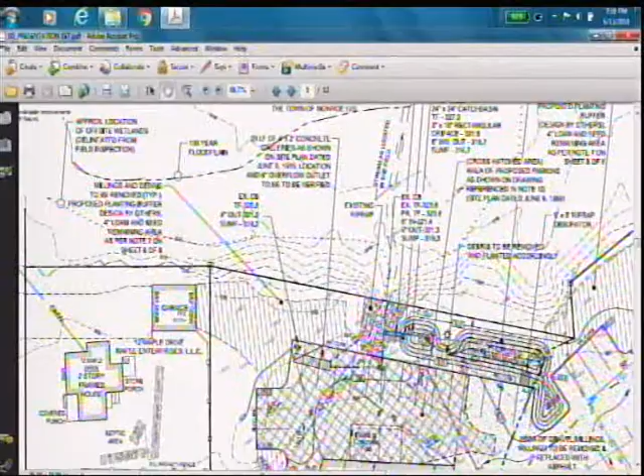We will be providing soil erosion and sediment control measures, which will be installed prior to any construction activities on the site. We're proposing silt fence down gradient of all proposed construction activities, as well as a stockpile area during the construction process. We'd also be providing hay bales in front of the proposed rain garden so that no sedimentation will flow into the rain garden during construction.

A comment occurred that Scott addressed, that we did not have the required 25 feet from the property line with the parking lot, as well as the 42 feet needed between the aisle and the length of parking in this area. From this corner of the building to here, we only have 41 feet, so we will have to eliminate 2 parking spaces, which will also reduce the amount of impervious area in the parking area, reducing the amount we'll be providing for retention in the stormwater drainage system.

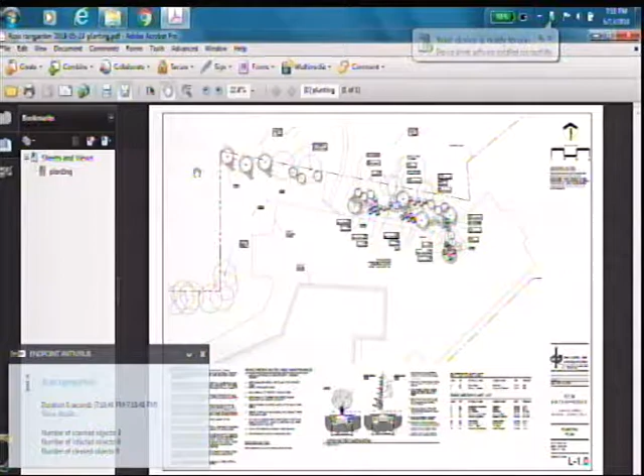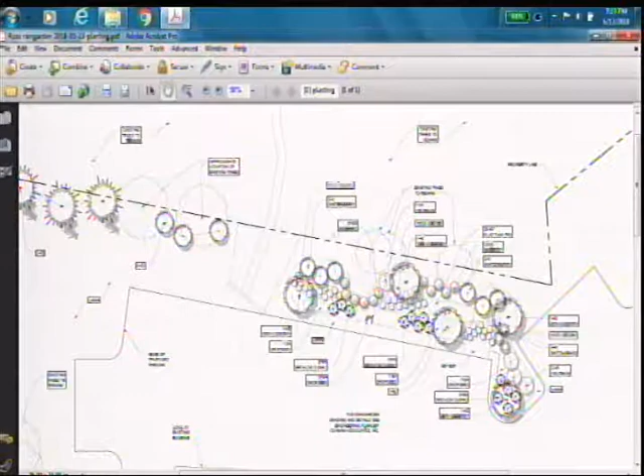Good evening. My name is Dean Pushler, licensed landscape architect, a sole proprietor working for REM. I was asked to come in and plant the rain garden as well as the buffer area. The rain garden is in this area, with a finger that comes up into this little island.

What we're proposing is 5 trees - Amelanchier canadensis, which is serviceberry - large trees, small shrubs, large trees in that aspect. The existing area to the north is heavily wooded with red maples, ash trees, and some existing white pines staggered on the property line here and here. I'm proposing 3 white pines as a buffer area, and 3 arrowwood viburnum here, interdispersed within the existing white pines.

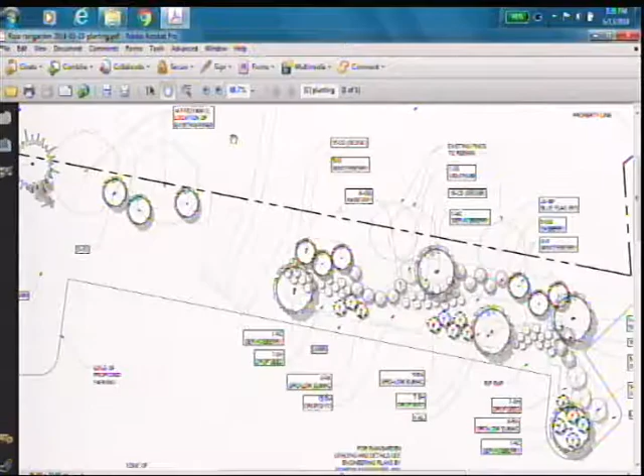Also within the rain garden - let me zoom in - along the bottom where it's flat, where most of the moisture will be, I have sedge, iris, and blue flag iris. There's switchgrass along the edge, winterberry along the edges, inkberry along the front, Gro-Low sumac here and here, and then prairie dropseed grass here and here, with some additional viburnums in this little island.

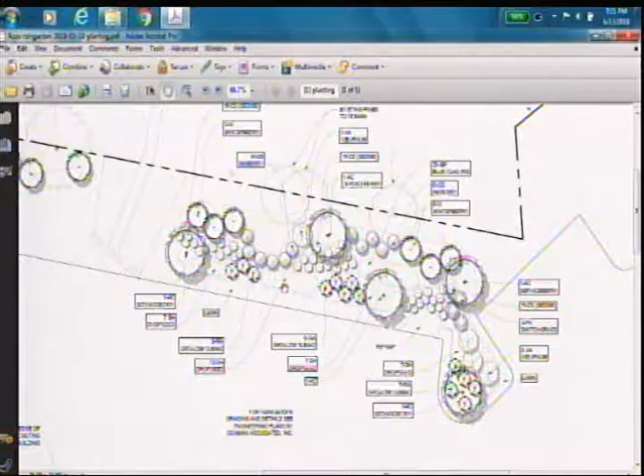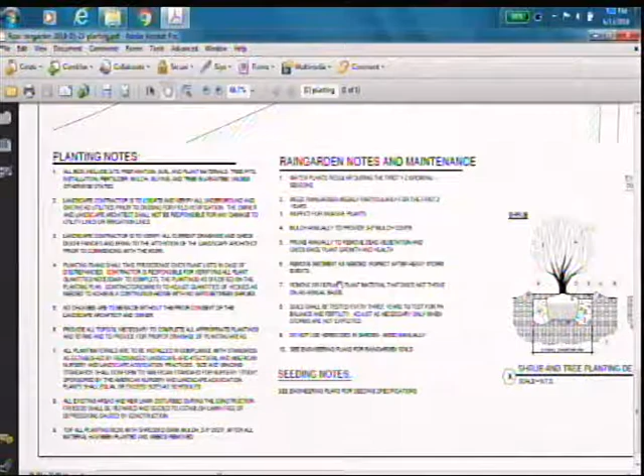So that, along with the drainage that was proposed, really will take care of stormwater. Maintenance-wise, it's pretty straightforward - I do have a maintenance guideline. Watering plants during the first two growing seasons, weeding, inspecting for invasive plant material, mulching annually to keep the weeds down, pruning, and removing sediment as needed once it's established and the parking lot's paved. That's basically it for the rain garden.

Dean, can I get your spelling of your last name? Yeah, P-U-S-H. Thank you.

So that's our proposal. I'm sure staff will go through their comments, but just to highlight a couple - there was that question Mark spoke to of the width in the parking area. We would accept as a condition of approval to remove 2 of the spaces to make sure we did conform to that. There was also a comment about additional buffer planting over here.

I believe, Scott, that's the area you're referring to. Historically, and we have a picture, an aerial survey from 1990 which I will submit and show around - unfortunately I don't have copies - but this had really always been open area, just high grasses. There was a cluster of trees around here, white pines that my client planted at the town's direction, but those have died over time and are no longer there. This area over here has really just been high grasses for as long as they've owned it.

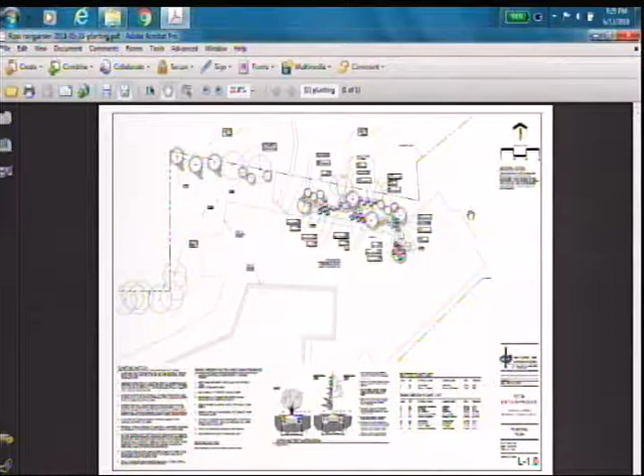Other reviewing and thinking, a couple things. Go back to your drawing of the site layout. I had questioned, sorry, I've got to switch.

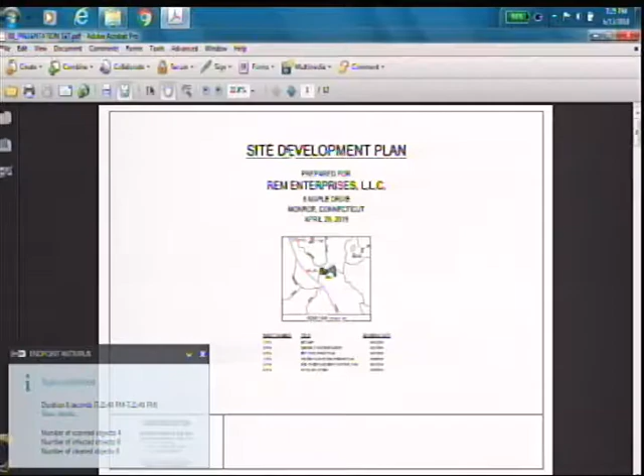The dimension for the parking lot -- you're saying you could reduce by 2 spaces, but I don't think you have to, because one of the things I was talking about was the actual dimension, the 42 feet. I believe you can extend the parking lot, the pavement portion of it, into the setback.

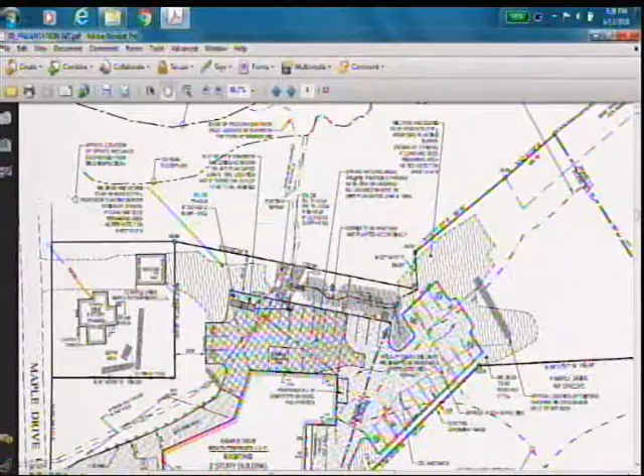That's not a restriction on the setback, now, they may have a buffer. You're talking about a zoning buffer? I think there's a zoning buffer in the I1 of 25 feet. In the B1 zone you don't have that, but in the I1, you're restricted. So you're being forced because of the zoning, not just the setback line. Exactly -- I was going to point out that you didn't have to with just the setback.

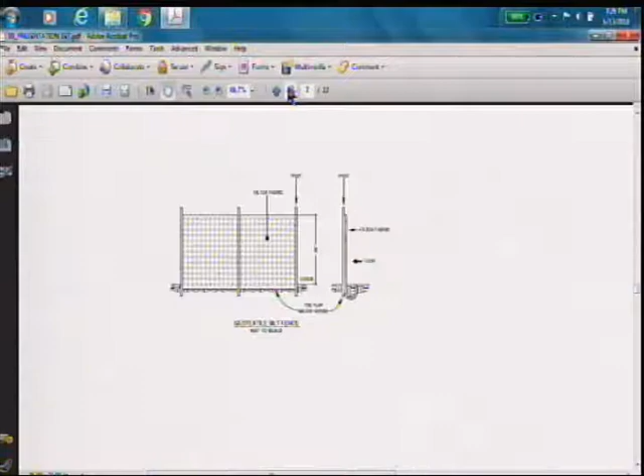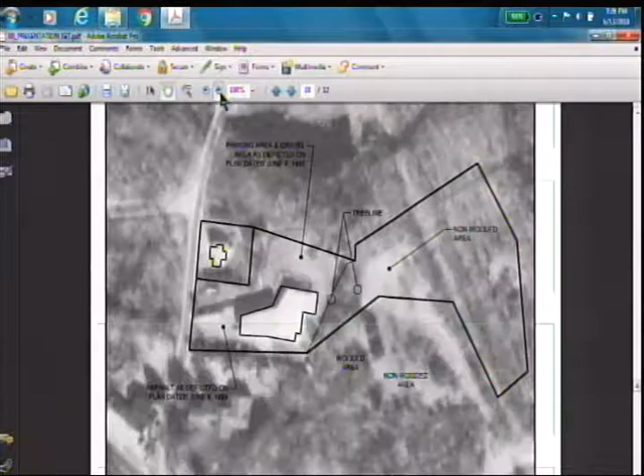Okay, thanks. Mark, that picture is in here just to show that -- it's a 1990 aerial photo. So if you look here, you can see this area, the marked non-wooded area, and then here this tree line area.

These were white pines that have died since. When were they planted? Early 80s. To that point, we normally do not recommend using white pines as plantings any longer because they don't last.

So if you could come up with something that would -- I realize you're trying to incorporate it into the existing ones, but if we could come up with something better than white pines that doesn't die off in a couple of years and blow over, that would be great. We're proposing 3. So we could substitute. Dean, why don't you come on, we could come up with a substitution. I was trying to use a native plant.

Understood. Well, we do have other deer-resistant and usable options. Native is tough, and obviously the white pines, the deer browse too. Cedar, Alaskan cedar, or eastern red cedar is a possibility. Should we -- spruce? Spruces, white spruce, something a little tougher. White spruce is a little tougher, yeah, looks a little nicer.

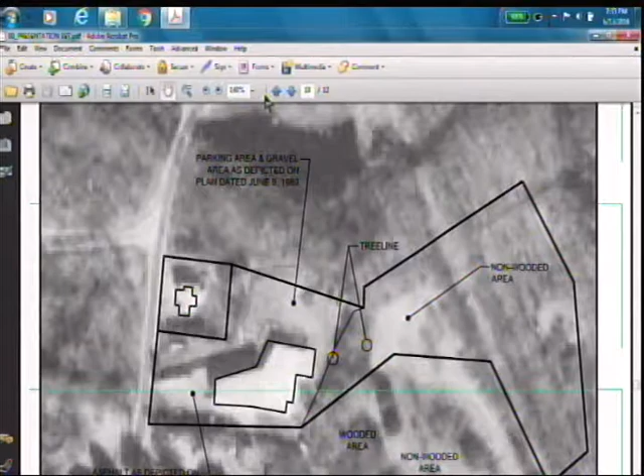Is there no curb in that area? Would the curb be part of the parking lot? It's sheet flow right into the rain garden, but the rest of the parking lot has curbing. I have a curb along the main portion, then an opening of about 5 feet with riprap for energy dissipation and erosion control going into the rain garden.

Now, which two parking spaces are you getting rid of? The one closest by distance to this corner of the building, right here, and this one right here. So what do you do with that area?

We can basically cross-hatch it out and put a no parking sign there, since I have a minimal slope over there, like 1.5%. If I create a curb running around, it would just be a paved area marked no parking because of a zoning issue. I don't know if zoning's going to like that so much—they're going to look for that being a green area.

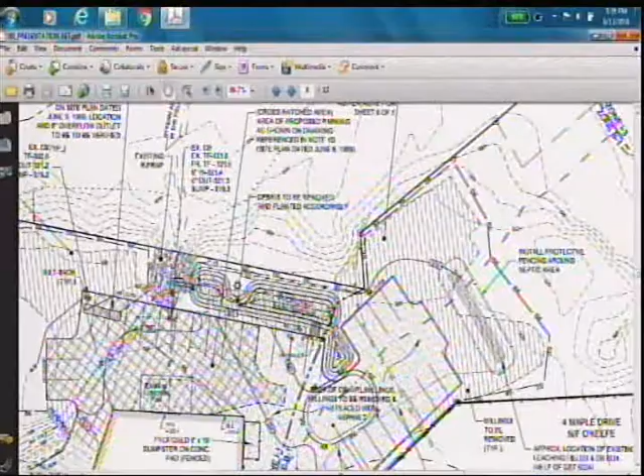Why don't you put the point of runoff at the end of the parking space? At that point, in the area over here—what contour is that? 324. And this one? 323. Usually you can crease the pavement and bring it over, but you've got a catch basin there, so you can't do that. Right now, basically where I have that valley... that's a high point there, isn't it? No, there are high points over here, your valley, so everything's going that way.

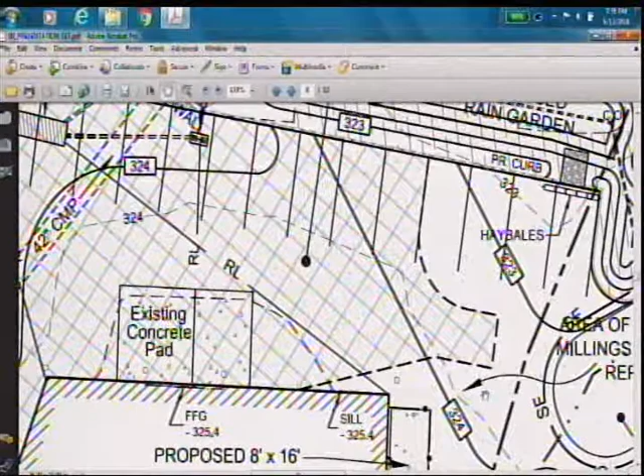Swale, sorry. So you've got a high point over here, and this is going this way, and it's going this way, so you can take this contour and pull it over here more, warp it a little bit, and make that island the high point. Then you might as well make it a green area—it's cheaper and it's less impervious pavement. My take on that is it should be green. Yeah, that can be done. Maybe I don't extend it the full 18 feet out with the green area. Typically you'd just have an island where those spaces were.

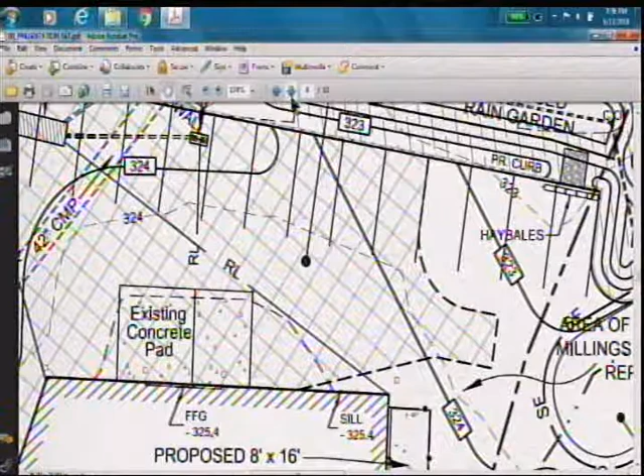I had a question on the sediment and erosion control plan—if you can go ahead, if that's the sheet or not, I'm not sure. It's a detail sheet, back up. Specifically, I wanted to blow up the discharge point from the rain garden into the water course.

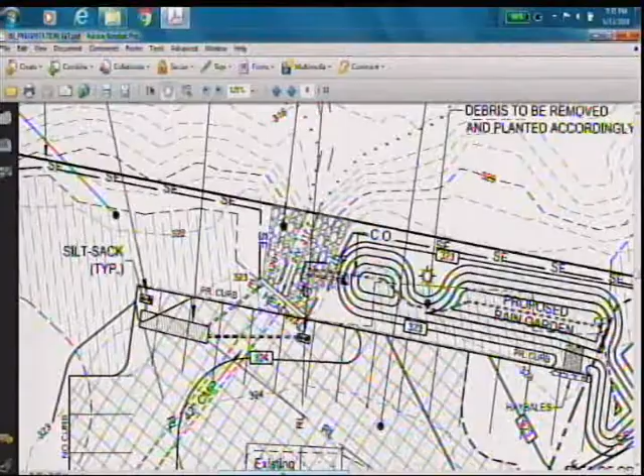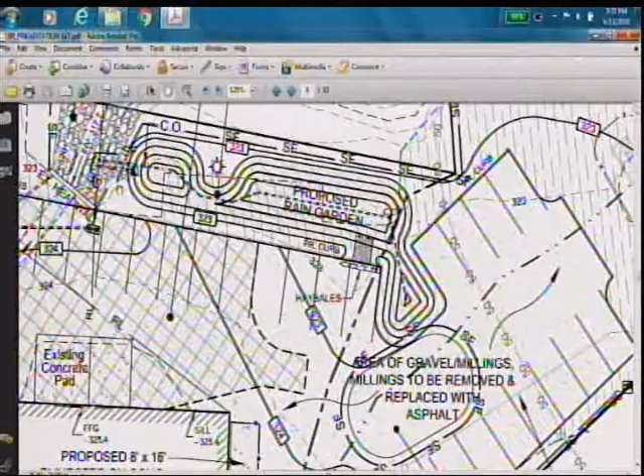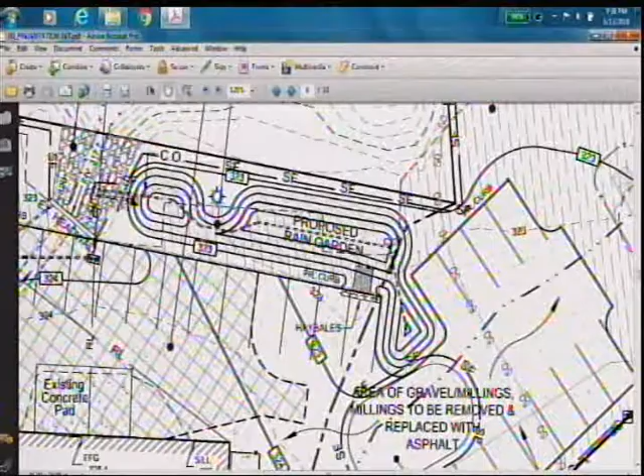So the silt fence is proposed 2 feet from the edge of the water course at the time, whatever flow that it was captured. Is there any way that you can just cut the pipe off almost right outside the edge of the catch basin and cut it right there? You'd have a riprap slope going down to the water course already, instead of being right into the water with the pipe.

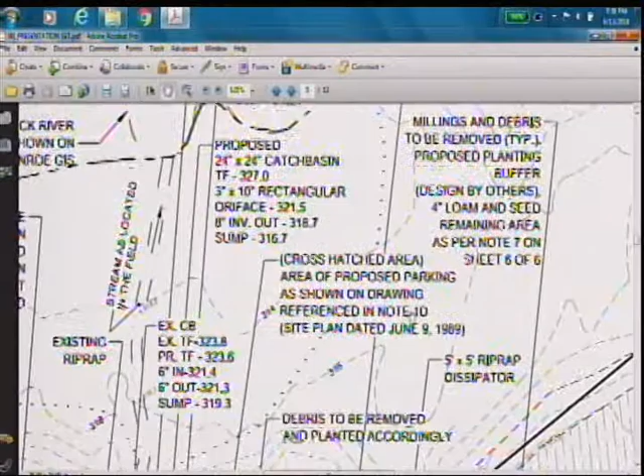The elevation of my outlet control structure, I might have to go to the other page. Hold on. My outlet control structure, my orifice invert is at 318.7. Top of my orifice going into the catch basin is at 321.5. I could potentially raise that up as high as the 8-inch outlet coming out, going into the stream, as high as I possibly can, so I don't extend the 8-inch pipe that close to the stream, cut back as much as I can.

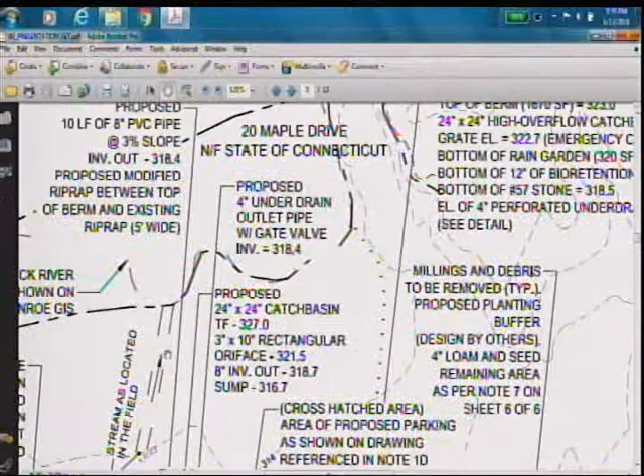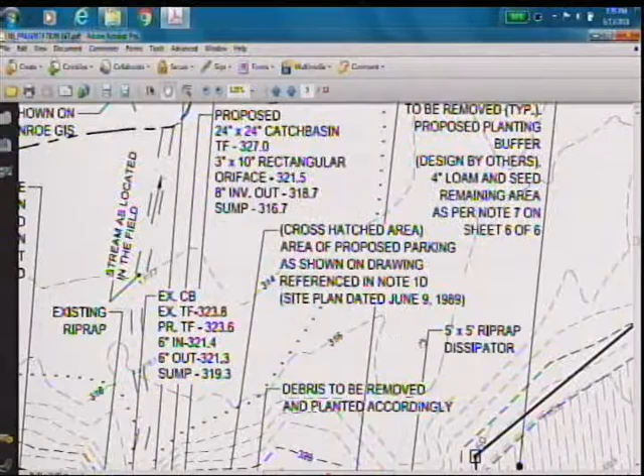The under drain pipe too is just as close, and the under drain is at 318. Yeah, the under drain was assuring that what he's got is water quality below the outlet orifice, assuring the basin would dry out after rainstorms. So I asked for it to be lower like that and run a separate pipe out to the stream. So if he raises that, it's gonna be a problem with assuring water quality volume, if I'm remembering correctly.

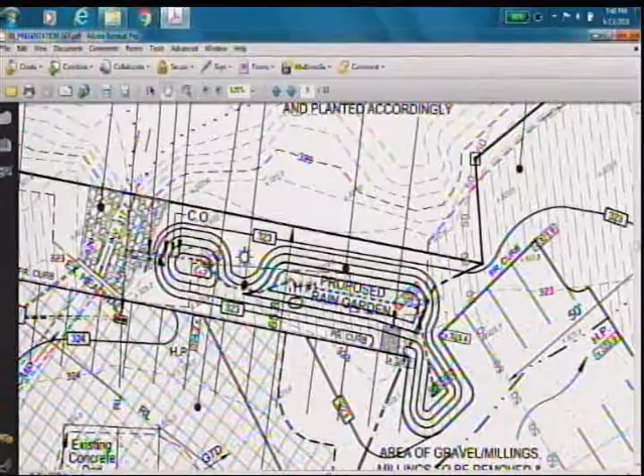So why not do a little tweaking with your proposed parking and shift, if you can, the rain garden further away from the edge of the head wall there? Right now you're kind of limited in space to put the rain garden. Well, that's what I mean, you may have to lose a couple parking spaces. But he would still need to get that elevation for the outlet, and then I can't discharge it onto the neighboring property.

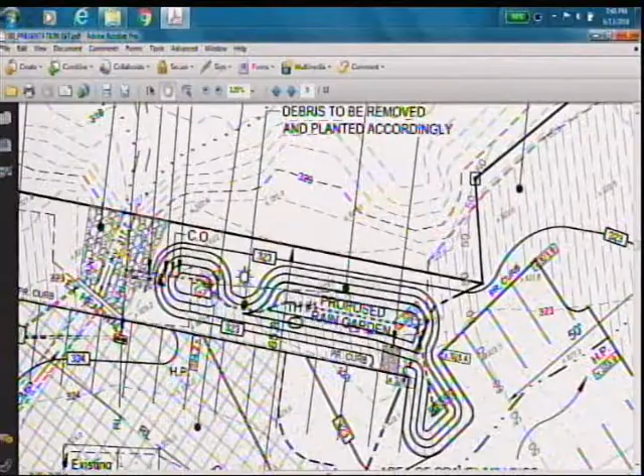We're talking about an area that's already disturbed, has riprap stone in it. And these pipes are going to have minimal velocity coming out of them, it's just an under drain. The trouble is the depth he needs to drain the basin. So whether the pipe's there, in my opinion, you're better off with the pipe being close, because if he pulls the pipe away, then he's got to ditch it, and that's where you're gonna get erosion because it's steeper.

So he doesn't have too many options because of the elevation he needs to drain it, not because of how the site is being graded. If he didn't want to go that close to the channel, he would go off to the north, but they don't own that property over there.

They could put it out anywhere along here and they wouldn't be anywhere near the channel, but they'd have to go way out there, and it's closer to the big river, plus they don't own the property. And the rain garden's shallow itself anyway, it's only 3 feet in depth.

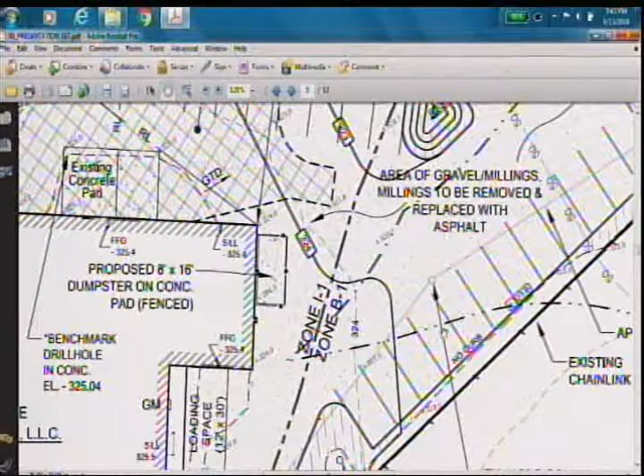And is the chain link fence staying? It says there's an existing one, is that supposed to stay where it is? I believe the chain link fence separating you and O'Keefe, was that put up by you? O'Keefe put it up, that's the neighbor's chain link fence. Oh okay, then that's a non-issue.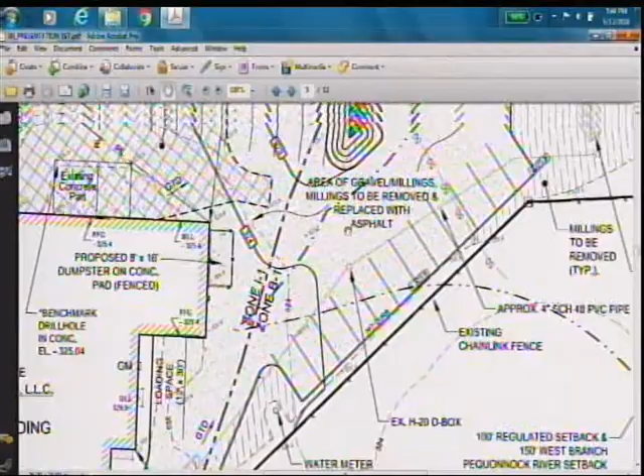I'm a little confused, pardon me if I missed it, but the area to the east where you're proposing the final 10 parking spaces, where the millings are being removed - above it says millings and debris to be removed, proposed planting buffer designed by others. Is there a planting plan designed by anybody for that section?

Is it in the last page? And note 7, I think that's what it refers back to. It does say note 7. I did not read that. It'll just be seeded, that's landscaping, just grasses.

So should there be some kind of line of demarcation there, or are we gonna have the same issues? Is there any future plans for that area? No, no, I mean it's possible in the future, but we would have to come back here obviously. So if there were any future plans for it, you would see it again.

So that's seeded with just grass seed that has to be mown regularly? It's in the engineer's plan, that's note 7, it's perennial ryegrass basically, wild grasses. So how often would it be mowed? Typically they mow that twice a year, spring and fall.

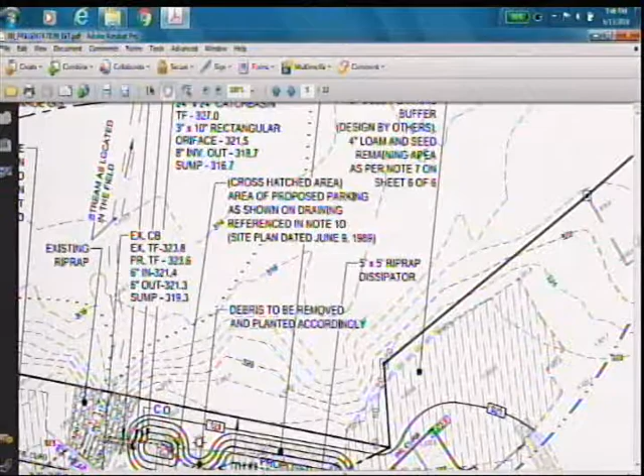Sorry for missing that. Is there a maintenance plan for the rain garden? Yes there is. I went through the maintenance schedule. I'm sorry, I did not. That's okay, I must be on another plan, I apologize. It was just a quick maintenance thing - weeding, fertilizing, mulching, no fertilizing typically, removing sedimentation, that sort of thing. And no herbicides, right? Correct. I'm sorry, thank you very much for your patience.

Wetland markers, so where are they? Yeah, no, no herbicides, just wanted to make sure. Okay perfect, thank you.

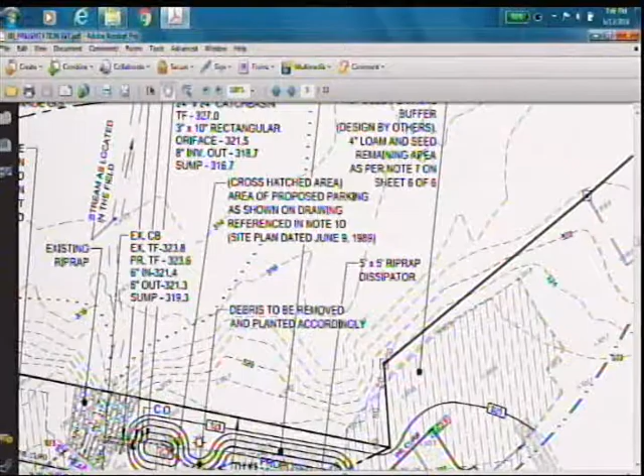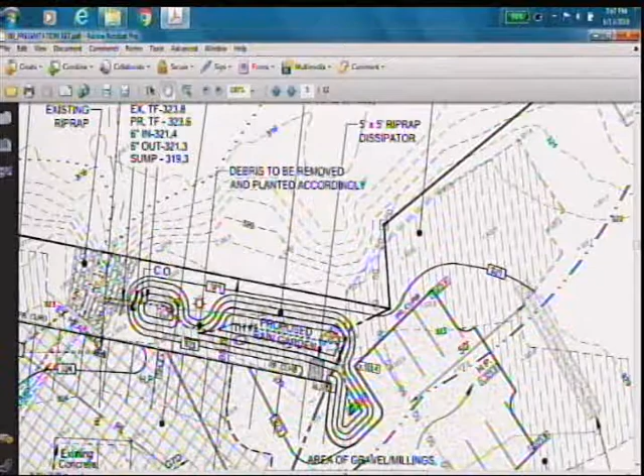On the two spots that have to be eliminated, could it possibly be done where they just pave the back edge 3 feet wide, so they don't have to regrade anything, let the water pass through and just shorten that island by a couple feet? No, we discourage that - it's a maintenance issue, in the winter the water doesn't go through there, so we try to avoid that. The expensive way of avoiding it is to put an additional basin in.

But the way that it's graded, they'll be able to put that island and the water will go either way, away from the island in both directions, so it's not really needed. In extreme cases I've seen it happen a couple times where they've done that, but it's not a great thing to do. Yeah, I get this.

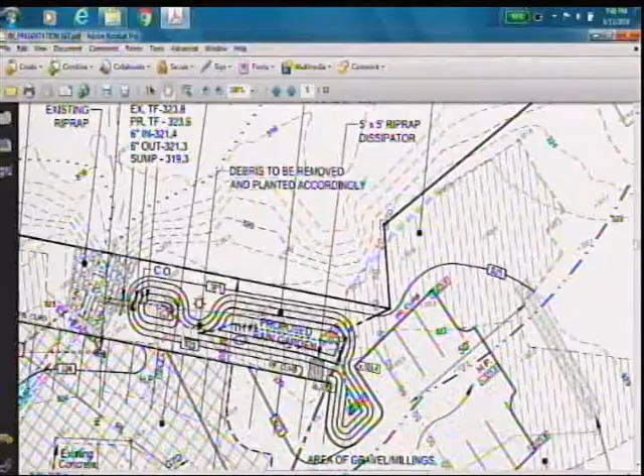Do I hear anything else from the commission? Are there wetland markers on here anywhere, and shouldn't there be? Are there any wetland markers plotted on the plan? I think we're just - no, basically it's just a channelized stream on our property, and then everything was kind of, on the neighboring property, it was just kind of site located by me, as far as the wetlands.

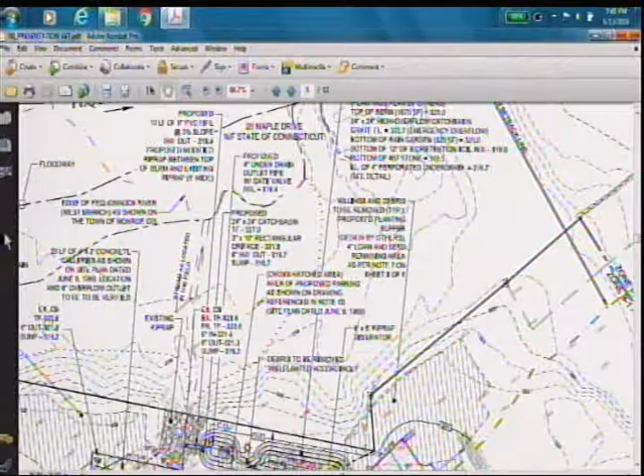I have to say that I missed that one, so we didn't talk about that. Oh okay, typically what happens, especially with remediation, is the commission's used to seeing markers. We have markers that indicate that - they're small, 4-inch metal, like $1.50 each. And they go - is there a fence there or no fence there? No, there's no fence there.

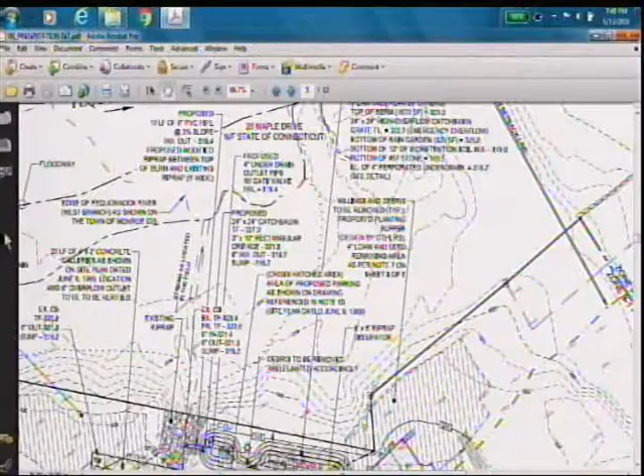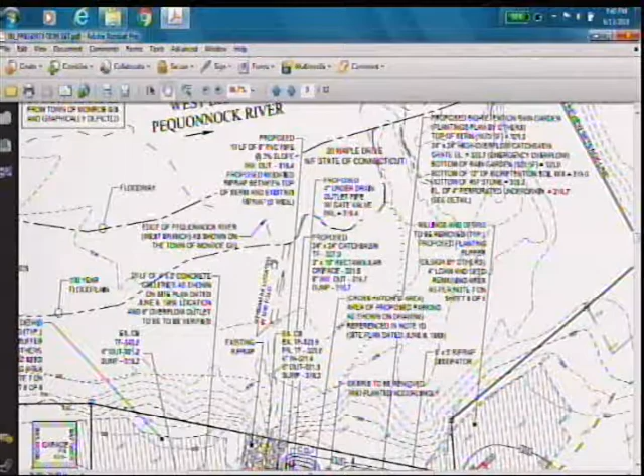They would go on trees or 4x4 posts, and they're typically put in - what do you guys want them, every 50 feet, 75? 50 is good. Where would we put them? My suggestion would be to put them on the property line.

Because they're gonna be maintaining the rain garden, even if those wetlands are on the neighboring property lines. Yeah, even because it just demarcates the regulated area for future things. Okay, that's all I have.

Anything else from the commission? Anything else from the applicant? No, thank you for your time.

Before you close, one last thing, just for the record, the bond recommendation in my report was $18,000. Were all of your comments addressed, Scott? Everything that I need addressed, I believe they did.

One comment about the spillway, just shifted over to the virgin area, I'm assuming you didn't have an issue with that, you didn't say? No, not at all. I think I'm okay, I can work that out. Okay, that's all. Thank you, everybody.

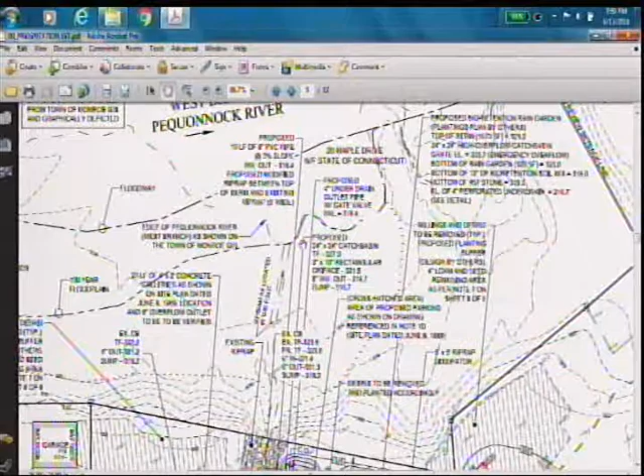I'm very happy to say I will close this hearing. Not that it was really closed, but, oh, exhibits. Public. Good thing I didn't bang my gavel yet. Yeah, it's not, but you can do that. We don't need to do exhibits because it's remediation, right? But we should anyway. It's also a regular building hearing, not a public hearing. Okay, so we're good? We're good? Remember, it's remediation, but it's also... Yes, yes, it's a development permit. But it's a regular hearing, so we don't have to do the exhibits. No, I don't agree with that. I think you should do the exhibits.

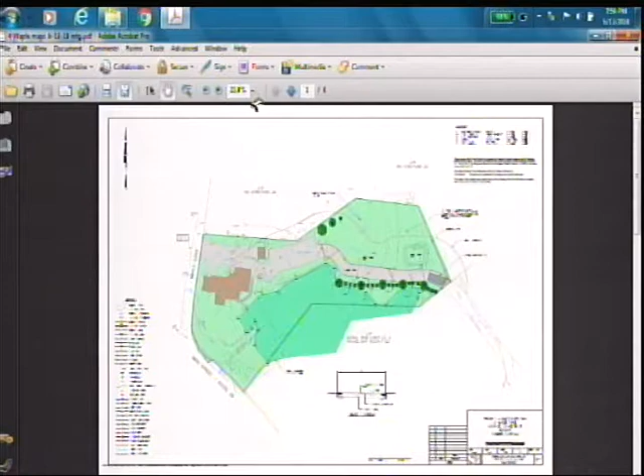Carbone, Spath, Bjorklund Associates. Good evening. I'm a professional engineer licensed in the state of Connecticut. At the last meeting, we presented a temporary or preliminary landscaping plan. The idea was that we're in 2 phases of landscaping. The first, on screen now, is phase 1: one, to clear the violation on the site; two, to construct a driveway that meets P&Z standards and provides access to Victoria Drive for safety reasons. We've also put a row of buffer plants along this area, and there's a water quality basin here and here.

We've also planted some plants in the setback area, the 25-foot setback, up to the regulated area line. The location of this driveway is based on the conceptual plan, which would have the driveway extending from the existing parking lot through here and accommodate a 10,000 square foot industrial building in this area. This plan is just to show why the driveway is there and what Mr. O'Keefe's ultimate plan for this site will be. Obviously it will have to have water quality treatment, landscaping, and a septic system, but that is the ultimate goal for this site, and that's the reason for the driveway location.

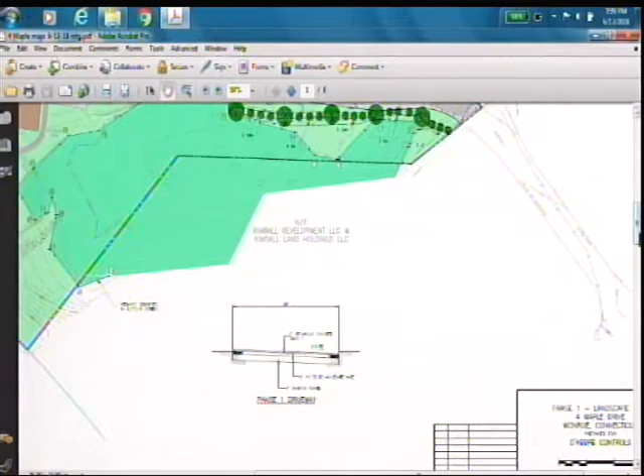Cynthia Rabinowitz, professional soil scientist and landscape designer. So I'm a bit of a dinosaur. My drawings are hand-drawn, although I believe Spath Bjorklund gussied them up a little bit for me, because I do my drawings the old-fashioned way. And so it's a very simple plan. Can I move it up? Yes, absolutely. Just grab it. Do you want to show the list? No, I wanted to show the full planting of the whole. Keep going down. Right there. There we go, okay, now it comes down a little bit more. Yeah, thanks. See, I told you I was a dinosaur. I do know how to use a computer, although my Windows operating system crashed last week, and I was ready to throw the computer out the window, but anyway.

So it's a simple plan using all native plants. I have not used any cultivars in here. In this area above the driveway, throughout this area, I'm calling for these trees and shrubs: 3 red maples, 3 sugar maples, and 3 American hornbeams, which are slightly smaller trees. They're generally considered an understory tree in comparison to the maples and the oaks, which would become the dominant tree in this area.

And then throughout the site, among the trees, I've got 4 shrub species in groups. The Amelanchier canadensis, which you heard in the last presentation, shadblow, it's known as, or serviceberry or juneberry - it has a lot of common names. Also Aronia melanocarpa, which is black chokeberry, another nice native shrub. This is all dry upland soils in this area, so we're not specifically looking for plants that will tolerate wetter conditions, so the black chokeberry will do well there. And then gray dogwood, Cornus racemosa, is another native species which does spread, forms nice clumps, so it will fill in and cover good size areas. And lastly, the bayberry, which is a very nice shrub.

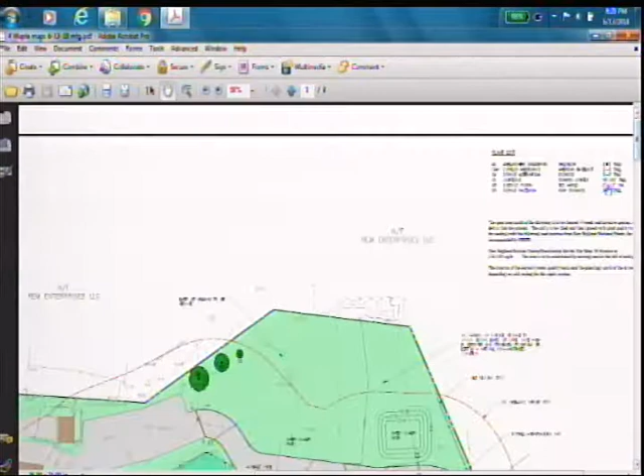We had originally proposed it on the north side of the driveway, along this area, to prevent people from driving onto or using this as a parking area. Mr. O'Keefe felt that since this is a grassed area, his employees are not going to drive onto it, and he's not going to allow anybody to park there.

Can I just add a comment to that too? So it's going to be herbaceous, but it isn't going to be grass like a lawn - it's going to be more of a meadow. So it's not going to be mowed on a regular basis and kept short. It's not going to be the kind of thing that somebody would think they could drive on.

Actually, we're proposing only to mow it once a year, in the fall. Should any birds want to nest, ground nesting, you wouldn't want to mow it in the spring, so we're proposing just to mow it once a year in the fall.

Maybe some boulders, if there's not going to be a fence. Yeah, I thought one of our main points was to put some type of barrier there on the other side of that road, on the other side of that driveway that we talked about. Right, am I right? Am I remembering correctly? I think so.

If that's what the commission requires as part of the plan, then we will add it back in. Are we talking about a phase 2 fence or a phase 1 fence? Phase one. Phase one fence.

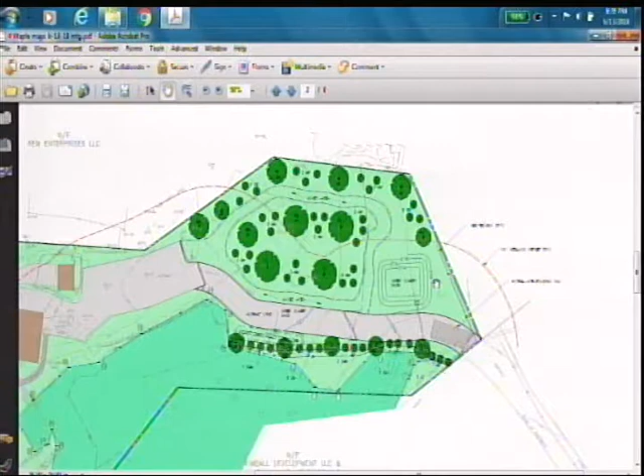I would recommend a 5 to 8 foot spacing of shrubs along the slopes. I'd still spread a seed mix under the shrubs, because otherwise you'd have to mulch it, and it should be seeded too, because you want the soil staying and you want plant coverage quickly. It's gonna take a few years for the shrubs to spread and the roots to get in and hold the soil, so you do have to have some quicker coverage on the side soils.

Are we talking 1 gallon, 2 gallon? Generally speaking, the New England wetland plants are conservation size plants, sized by the plant rather than by number. So they're 2 to 3 feet or 3 to 4 feet. Some species are 4 to 6 feet, but those probably wouldn't be the species I'd recommend.

I can get this to you by the beginning of next week, if that's acceptable. Well, as I said, however you want to do it.

We just did the testing today, and we have not done percolation tests there, so I can't tell you how long the water will be standing in these basins until we know that. Since they are temporary basins, we're not gonna put an under-drain system in. We may wick parts of it down to the underlying soils, but not an under-drain system as such. If you're anticipating that you're just gonna keep it dry and not have a wet basin, then you can go with that assumption.

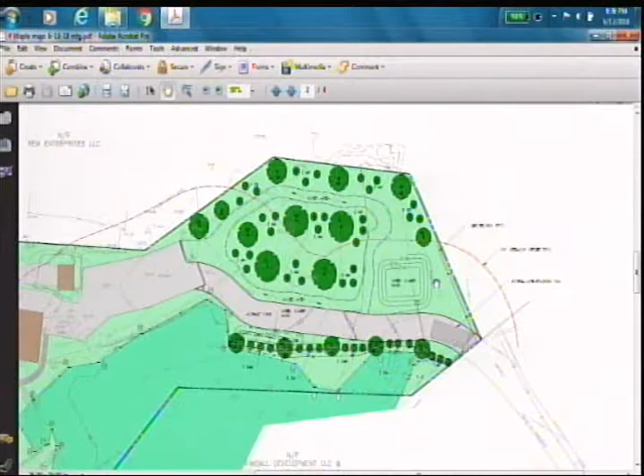Well, right, that's what we want to have. But still, immediately after a storm, is it gonna take 2 to 3 days? Apparently that makes a difference to the plants, with the seed mix. It won't be the same seed mix that I'm recommending for the upper area. So we'll have to get back to you once we do the percolation test, I can get a better idea of that.

So we're talking about submitting this to the office before the next meeting? We will try. That's a week and a half, 2 weeks from tonight. Well, that meeting is 2 weeks from yesterday. What are you saying, you want it left on the agenda so you can see it, or do you just want it submitted to the office?

Unless, well, if you're comfortable with it, we don't know what shrubs you were suggesting. I can give you a few off the top of my head. I'm okay with that. You're okay with saying that? Guys, you're good? Yeah, no, he doesn't mind.

They're all native, locally sourced, New England restoration wet mix, the shrubs at 5 to 8 foot spacing along the slopes, and they range in height from 2 to 4 feet. Okay, that's fine then, and we will have the details for the engineering report.

So I also need to know, it sounds like you're trying to put some closure on this. I also need to know, what did you guys decide about the fence along the driveway? You were talking about that, you need to resolve it.

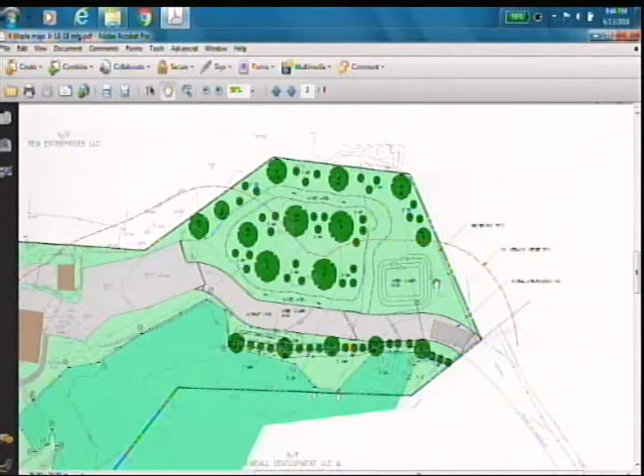Which is pretty consistent with what we've been doing on most of our projects, right? Yeah, and the only alternative, whether it be a split rail fence or boulder. Is there an area on the proposed building plan that would be conducive to a fence? As a decorative feature, that would be about it. I mean, it would not serve a function, but you could have a split rail fence on this side of the loading docks or down here. It could be reused, but it would be strictly ornamental. It wouldn't have any particular function.

This whole area is surrounded by a chain link fence. Let's move on and we'll talk about it when we actually make a decision.

What about timeframes? Do we want to talk about that now? Between if the building doesn't go up, and we want to see those phase 2 plantings go in? Well, first of all, we should probably talk phase 1 plantings and when they should be going in, and if they should be in by a certain time. Whether or not the driveway goes in is not as important as the plantings and the rain gardens, the water quality.

I think the millings have to come out first, right? Yes, the millings have to come out first. So I would consider the millings and the plantings have to be done within a certain amount of time. And the driveway, I don't know. What's your timeframe on that?

Do we have to go to planning and zoning? You have to go to planning and zoning, that's correct. So it's gonna be a fall thing. Yes, by the time we get through with all the commissions, certainly. Can we do plantings in the fall? Oh, definitely, that's a good time of year, fall's the better time to do it anyway.

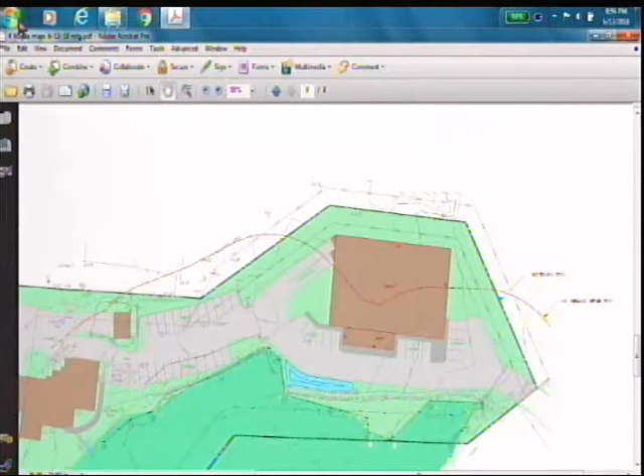Notice of violation discussion, IWV 2014-19-225 Turkey Roost Road. Is it Bassani? Discussion of remediation plans. Stand up, good evening, thanks for being so patient. Scott, I have... Mine, you could just pull that out. Pull this one out? Yeah.

It's gonna pop up. You'd use the mouse there.

Did we get paperwork on this one? No, okay. There was an email, but no paper. Right, okay, we know that.

So what we have here is there was a notice of violation. They had come before your commission quite some time ago, and there was a resolution in terms of using markers. She has some variations she'd like to discuss with you about that. So, floor is yours.

Hi, I'm Jean Bassani, 225 Turkey Roost Road. This is my home. I purchased the home in the condition it is today.